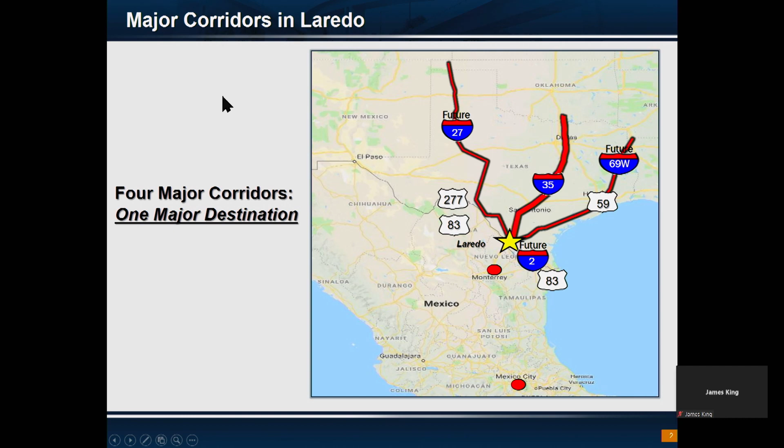For those familiar, that Ports-to-Plains corridor, which constitutes US 277 and US 83 in our area, was designated by the legislature through House Bill 1079.

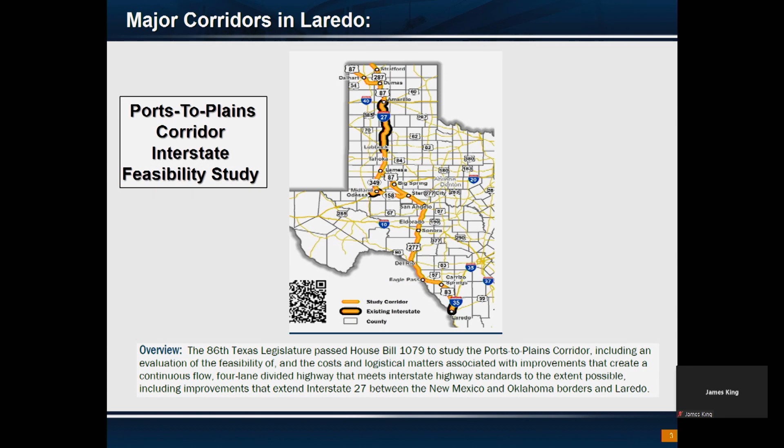So that is how that corridor got designated. The main purpose is to create another main north to south arterial throughout the entire state. 70% of the population in Texas lives on I-35 or to the east. I-35 is the only major north to south interstate throughout the entire state. When you think about how big the state is, this I-27 corridor is going to help further populate and drive economy throughout the rest of the state.

Currently, in the TxDOT Laredo district, those 8 counties I showed you, we have $474 million of projects under construction. In Laredo, Webb County alone, we have $314 million currently under construction.

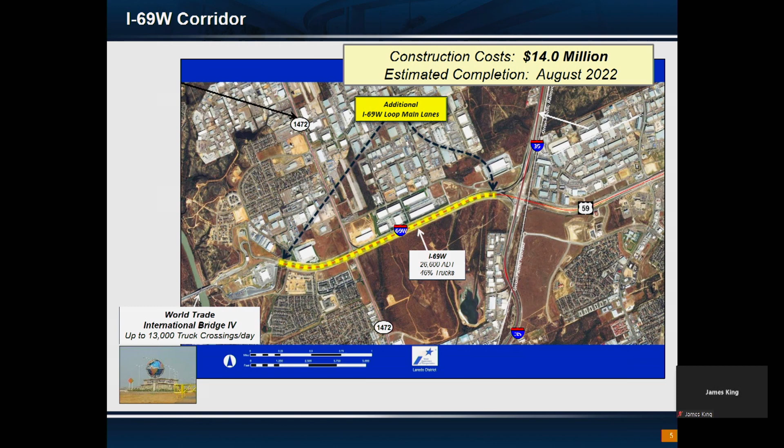The importance of that, in conjunction with the project the city of Laredo is doing to expand the fast lanes with $10 million of CBI funds that has oversight from TxDOT, is to create a more efficient flow and safe travel of commerce in and out of the World Trade Bridge. We hope to have it done within the next year so that you all can continue to operate more efficiently in that area, in and out of the World Trade Bridge.

And how does the deadline look, like the completion date? The deadline looks good. If you notice right now, we're widening the bridge, which is kind of the last phase that we have there.

We're also going to be adding an off-ramp that comes off the direct connector that brings you into Laredo and takes you to the World Trade Bridge. We're adding a brand new off-ramp that lets you get off at that point so you don't have to go to the existing off-ramp.

So for people using that route to go into that warehouse area, you can get off and already make that maneuver ahead of time instead of having to go down to the intersection of Mines Road and I-35. That'll be an extra off-ramp that doesn't currently exist right now. So you'll have an off-ramp.

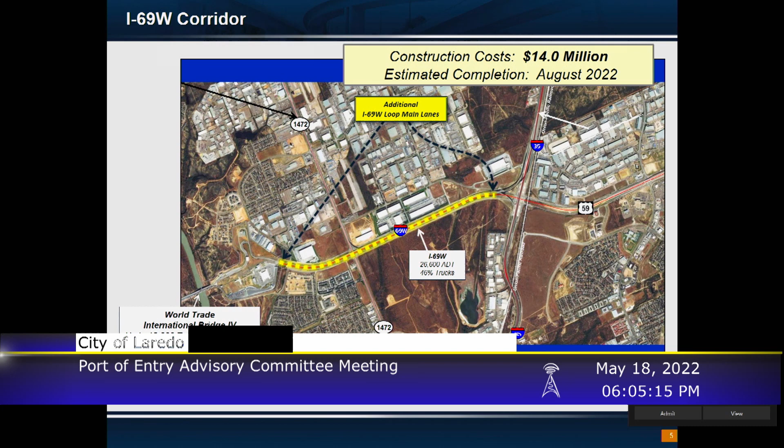And we're going to do it? Where is that going to be? So the off-ramp that comes on the direct connector, that's coming south to west—yes, south—that direct connector will have its own off-ramp, getting off onto the frontage road. Okay, yes.

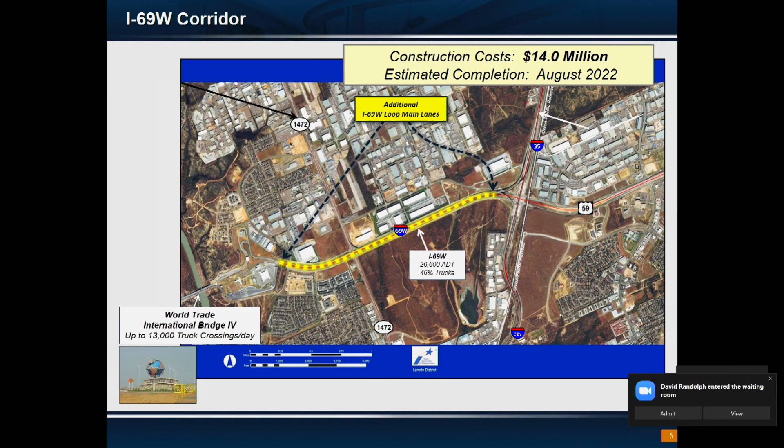Another major project we have, just not even a mile east of there, is the project everyone sees under construction, where we're bringing a brand new bridge over Union Pacific. Right now, just north of Shiloh, you go underneath the railroad bridge. We're going to fill that completely once the bridge is done, and you will only go over it.

We're building 2 direct connectors: direct connector number 5, which goes west on US 59 to south on 35, and direct connector number 8, which goes east on 59, south to 35. We're also completing a section there to widen I-35 to 6 lanes. Texas has an initiative called the Texas Clear Lanes Initiative to widen 35 to 6 lanes throughout the whole state, and this is our part to continue completing that initiative.

You see referenced direct connector number 5 and number 8. If you look at what we have built right now at the intersection of I-35 and I-69, we currently have 3 direct connectors built. This project will complete 2 more, so when everything is complete, there'll be 8. The next 3 are programmed to come down and get constructed in that area.

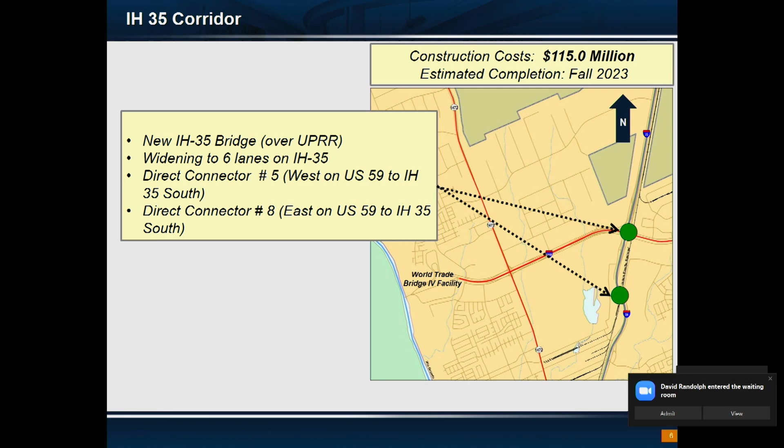So the exciting part here, right? In the next 10 years, we still have over $1 billion of project funded in the Laredo district. And given the fact that Laredo is our major urban area, given the importance of the World Trade Bridge to the rest of the state and the rest of the country, and obviously the population driven, which dictates a lot of the formula of how we get money...

$660 million of that $1 billion is going to come to Laredo Webb County in the next 4 years. So it's going to be a very busy time for construction and a lot of growth and expansion for the city.

So I just want to put a disclaimer here. I'm about to show you some estimates, some letting dates. As you all know, we live in a dynamic industry with prices of materials and construction costs going up. So all the information I'm going to show you, the let dates, construction estimates, may be subject to revision. We do keep a close monitor on them, but given the climate we're under right now, some of them may be subject to change.

So the first project I want to touch on here is the US 59 corridor, which is the future I-69. This project has almost $290 million of funds secured - that's funded money already secured for this project. In addition to that, we have another $166 million of right-of-way costs associated with this project.

The main emphasis of this project is it's going to take US 59, or Loop 20, to interstate standards. Right now you only have 3 lanes in each direction. When it's all said and done, you're going to have a loop that looks like Loop 410 in San Antonio - one-way frontage roads on each side with 3 lanes in each direction, and then main lanes in the middle, 3 lanes also in each direction going north and southbound on Loop 20. So in total, you're going to have 12 lanes of traffic along that I-69 corridor.

The first project we have programmed for August of 2023 is going to build an overpass at Shiloh, an overpass at Del Mar, and an overpass at University. Along with those overpasses, we're also building the frontage roads on the side, so it's going to be a complete constructed interstate up to University. The project that follows is going to complete the overpass at Jacaman and the overpass at Airport, along with the frontage roads in that area as well.

And again, the point of this is this will complete or upgrade US 59 to interstate standards all the way from the World Trade Bridge to the intersection of I-69 and Saunders.

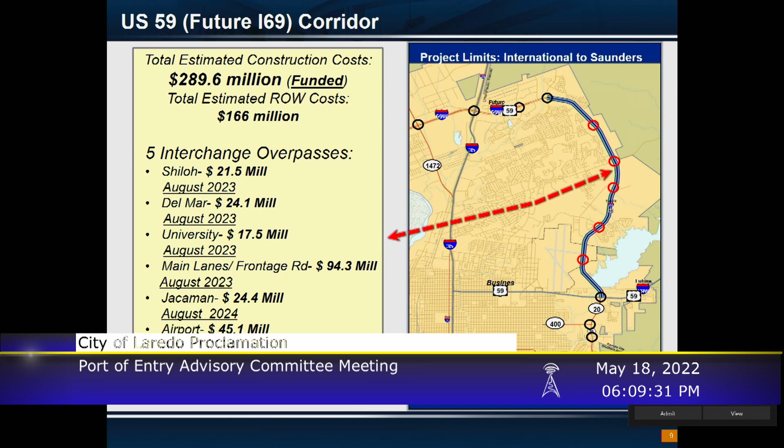Is that the proposed finish date or is that the start date? So these dates are the proposed dates when we let the project. What that means in TxDOT terms of letting is that's when we go to bids. TxDOT awards the project to the low bidder that meets all the specification requirements the state has. Normally the construction start date is about 3 months from that let date. Given a project as complex as this one, the estimated time frame we have right now is about 36 to 40 months.

Thank you. Are you still missing some? No, that is all the money, all the funding for those projects for the district. Are you still missing overpasses pending? No, for that area, from this project, we'll complete the interstate all the way from the World Trade Bridge all the way to Saunders - complete, all the way to Saunders.

So when you look there, I'll show you now what the plan is. The plan from there is going to be to take I-69 to the east, which is the ports-to-ports corridor that'll connect us with Houston eventually one day. So I'll show you that plan.

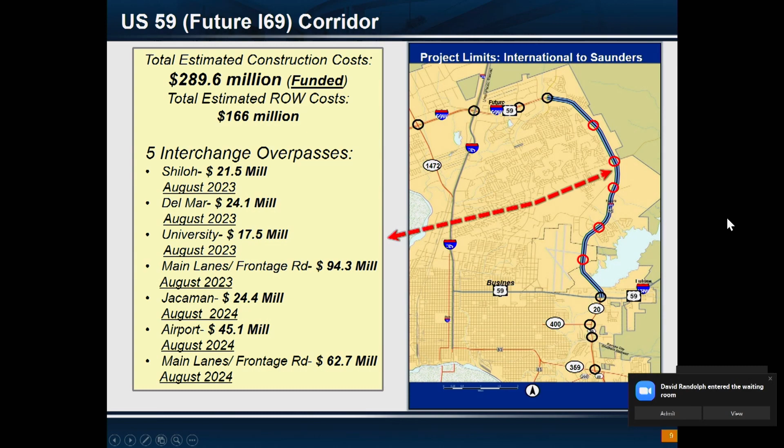Another major project we have funded is a bridge replacement and widening of I-35 to 6 lanes at the Uniroyal Interchange. Everyone is familiar with I-35 and mile marker 13 with the congestion that occurs at the Unitec Park and 35 area. So what we're going to do is completely remove and replace that bridge, that current overpass at Uniroyal. Underneath, as you exit Unitec to cross east and west, that's going to be an 8-lane section underneath there - 8-lane section, we fix the bridge.

We obviously go in there and redo all the railroad crossings, so there's a lot of coordination we're doing right now with Union Pacific there. In addition to that, we're going to design a brand new interchange about 1.5 miles north of there, where the future Hachar-Reuthinger connection is going to be. That's going to connect Mines Road with I-35.

The intent behind that is to be able to properly plan a full, efficient movement interchange at that intersection, similar to what we have at I-35 and I-69. So when you think long-term, I mentioned 8 direct connectors. You see the multi-levels that we're building on I-35 and I-69. That is the plan we have in the future for the intersection of I-35 and Hachar as well.

Are they ever gonna align Killam with 35? You have to turn right and then turn left.

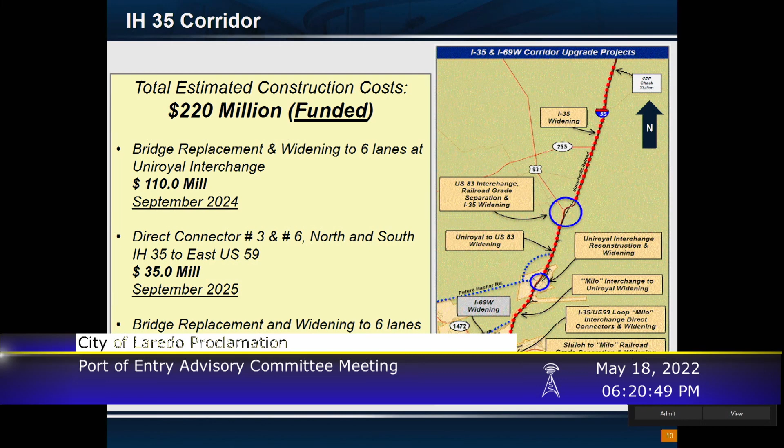I've seen this presentation, which is really impressive, and thank you for presenting it today for others who haven't seen it. But it's just frustrating because things are not happening immediately. You look at those dates, but realistically, we now have the problem with materials and labor, and all those things come into play. You look at the dates and think, well... Yeah, they can never get here fast enough, believe me, we're the same.

One of the things to acknowledge is that once construction starts, stuff is going to get a little bit worse as far as inconvenience for the traveling public during construction. But the point I want to message or send home is that we are on the right track. These are funded projects, not wish lists, not what-ifs. These are projects that are funded. Plans are completed, environmental is finished, utilities are relocated, right-of-way is being purchased. So we're on the right track. That's the message I want to stay on.

So moving forward, I know we're running a little over time. Again, we talked about the 8 direct connectors in the future. The other remaining 2 are funded at $35 million, which will be north and south I-35 to East 59.

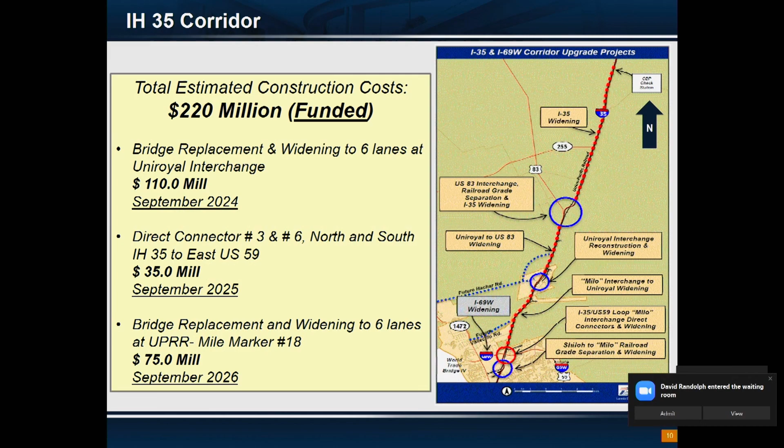And then at mile marker 18 on I-35 currently, where our tourist bureau is, you have to go underneath the railroad bridge. We will be filling that underpass and moving that bridge about a mile to the northwest, so you will now go over the bridge instead of under. We're also reconfiguring the way IH-35 and US 83 connect, building a direct connector that takes you from IH-35 northbound to US 83 northbound, so you won't have to get off at an intersection anymore to do that maneuver. That project is very important, since that section of 83 is the future I-27 corridor, making it another critical intersection for the city of Laredo.

You said you're going to move that bridge. What's the logic behind that, taking into consideration—I know we're growing, but it just seems like it's double work. And is UP helping fund some of this project or not?

That project, if you look at it right now, has gotten hit quite a few times. It's in a vertical curve and a horizontal curve, which is not ideal anymore with the new design speeds and requirements that the federal government requires us to have. So part of that project is to upgrade it and make it safer for the future, and to fix that intersection so we have more mobility where those two interstates, I-27 and I-35, are going to meet.

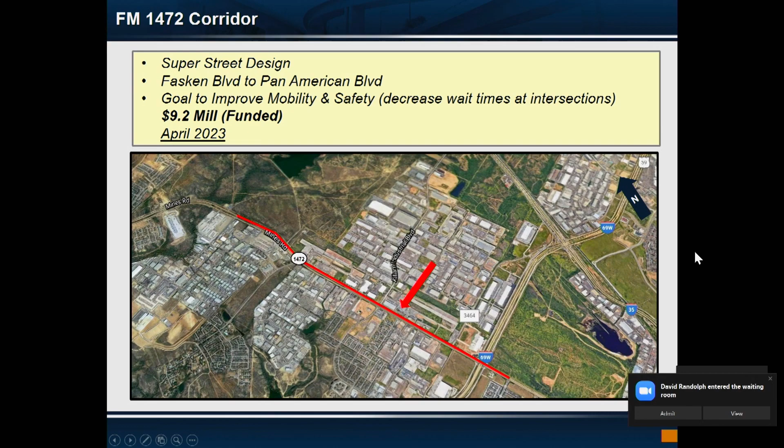Ito, are you touching the turnaround lanes for Killam? Let me see, how do I go back? Which ones exactly, the turnaround, the right turn lanes?

So if you look at the right turn lanes, there's actually a project under construction right now adding an additional right turn lane onto Killam Boulevard. So if you're heading north on 1472 Mines Road, taking a right into Killam, we're building a brand new, free designated right turn lane all the way from Fasken to Killam.

We partnered with the RMA and we're also helping them construct a right turn lane from Killam heading westbound onto Mines Road northbound as well. So that'll all be dirt right now. That's correct.

Why has it taken so long? So that project, if you look at it, there were modifications that had to be done to the traffic signals in that area. Those of you involved in construction know there's been a shortage in steel and delay times, and that was the main reason holding up the contract in that area.

But that project is underway, and I was told material should already be here within the next month, so construction should be commencing shortly. And they ordered those poles? Yeah, they ordered those poles about 8-9 months ago, and they're barely getting them now. That's a big... shortage.

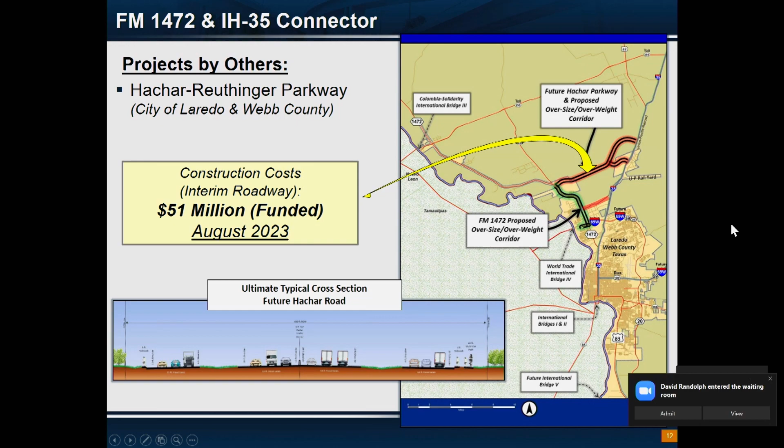So the next project, just real quick, these are unfunded and under development projects. These are projects we don't have money for, but we know eventually we're going to have a need for them. So TxDOT is taking a proactive approach to design them and get them ready, so when funding becomes available we can have them ready to let.

So at IH-35 and US 59, there's that one pending direct connector that doesn't have funds. That'll close and finish up all eight connectors, that's 25 million. Obviously, IH-35 at Carriers and the XXX overpass, we're going to be widening both of those overpasses at 45 million. So we're already working on plans for that.

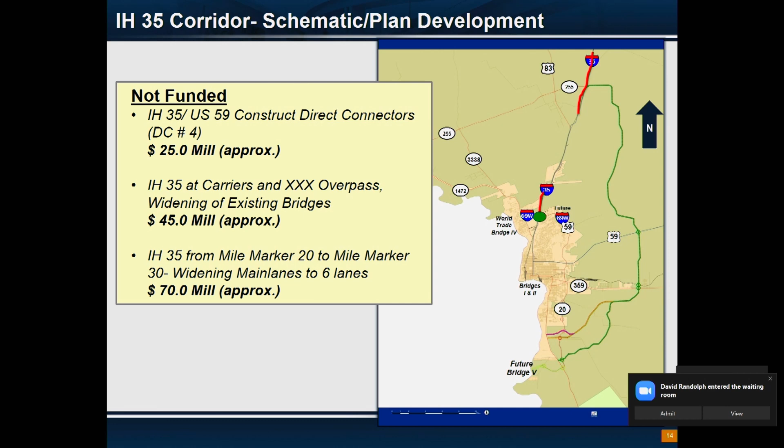And then we're looking at expanding and widening I-35 from mile marker 20 to 30 to six lanes. That's part of the initiative I spoke about, taking it to six lanes throughout the whole state, and that's another 70 million. And then certainly not least, another project very important to the area is Vallecillo Road.

It's a project currently being developed by Webb County, by the RMA. It's currently partially funded at 17.5 million, so there's a gap there, a 14 million dollar gap. That's the money the RMA, the city of Laredo, and Webb County are asking the Transportation Commission to fund through those Category 12 funds I spoke about earlier, to try to get it fully funded.

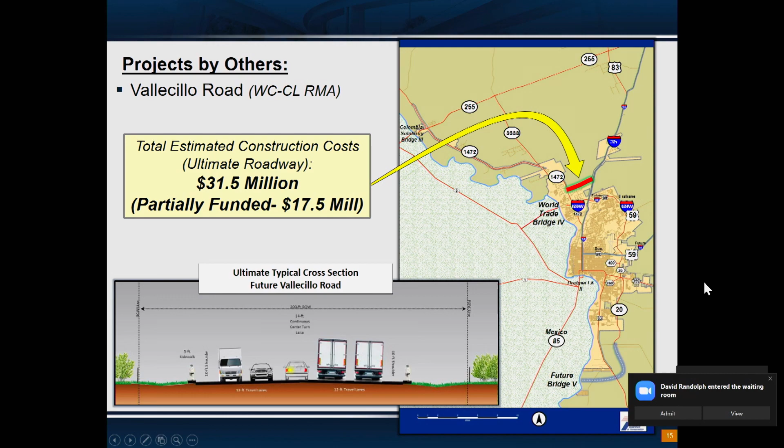Chairman, could I make some comments? Yes, sir, go ahead. Thank you, Tito, and thank you for the presentation you gave last week, and to the members of the committee who were able to come. We had a little more time and had some healthy dialogue.

I'd like to suggest that, in addition to all the funded projects that need to stay on schedule and provide that mobility and infrastructure, the unfunded portion of Vallecillo Road should probably be high on our radar for lobbying and advocacy and support letters, and for us to come together as a community, public and private. It's because it's so important to have that outlet on Mines, between Mines and 35.

Could you share for a minute what you shared last week about the possibility of Category 12 funding filling that gap, as far as how the process works? Well, I don't want to put words in your mouth, but what I understood last week is that we may get some good news in August that the Category 12 money could fully fund the remaining portion of Vallecillo.

Again, those decisions are made by the Transportation Commission. They're currently deciding that, and we're hoping to have an answer by August. I guess really with TxDOT locally, we don't have an impression of whether that money is going to come through, so I apologize, Mr. Lincoln, if we gave a false impression on that.

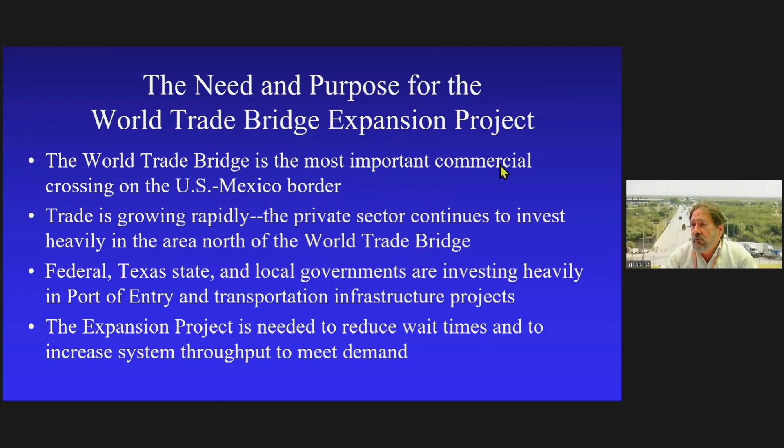World Trade Bridge is the most important commercial crossing on the U.S.-Mexican border. Trade is growing rapidly. Private sector is continuing to invest heavily in the area north of the World Trade Bridge. Federal, state, and local governments are investing heavily in port of entry and transportation infrastructure projects. We saw some of those earlier. This expansion project is needed to assist in reducing wait times and to increase throughput at the port of entry to meet the increased demand that's going to happen. We know it's going to happen. The demand has already increased dramatically since the bridge was opened back in 2000.

Some statistics. This is from the Border Trade Master Plan that was prepared and published in 2021 by TxDOT. I think Joe mentioned this particular report. In 2019, we had about 2 million trucks come through World Trade Bridge. The wait times averaged back then 30 minutes. The 90 percentile wait time, which was the upper end of the wait times, was 53 minutes.

TxDOT is projecting that we're going to over double the throughput at the port in 2050. So 5.1 million trucks are going to come through the port. The wait times, if nothing else happens, nothing else is done to improve the throughput or the bridge or anything beyond even port of entry, are going to rise to 527 minutes for standard days and standard times, and up to 930 minutes for the 90 percentile wait time. This is an increase of 255% in volume only, and over 1,600% in wait time. So we need to get working now to make sure we don't achieve these in actuality.

We want to make sure things work better. One of the things that's going to help assist the throughput at the World Trade Bridge is the Fast Lane relocation project. And what you see here is a drone shot, about a month old, photo of the Fast Lane project.

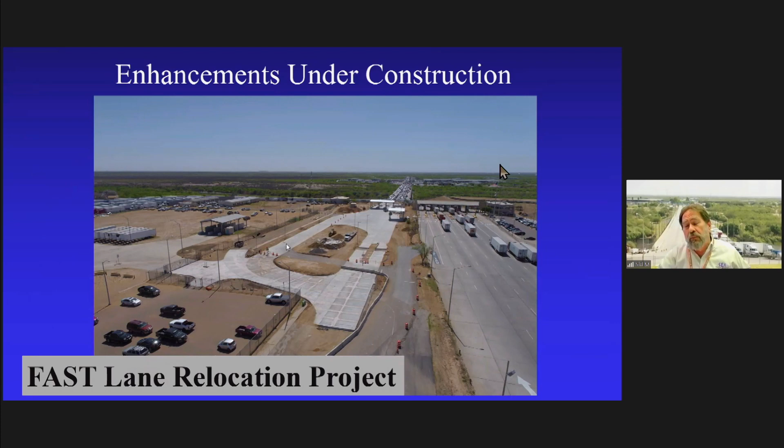Other projects ongoing: a right-hand curve coming out of the existing exit booths that are there today. This has been a topic of discussion between ourselves, the city of Laredo, and the Mexican counterparts for many years. In reality, most of this widening section is being done by TxDOT now as they widen I-69W as it exits the port.

Also in process are existing lanes weigh-in-motion scales. We're working directly with the city of Laredo and their technical consultant, Transcore. Transcore has our 99% complete construction plans and is reviewing them now to make sure it works well with their equipment. We're planning to try to construct this facility this summer as well.

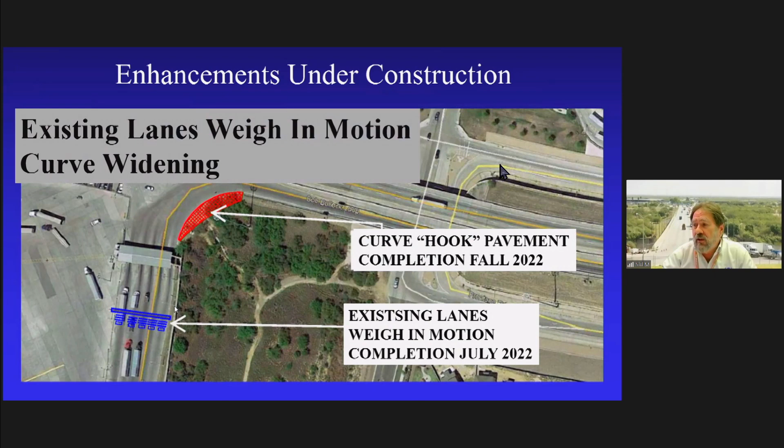The thing that may cause us a little problem is a steel overhead sign bridge, and there's also some computer hardware that needs to be acquired by Transcore. As you're all aware, some of that stuff is hard to get these days, so we're working to get this moving forward.

This ties into some of the projects Mr. Tito Rodriguez already talked about, the widening of I-69W. We'll be pushing about 2,000 trucks a day through the fast lane that'll hit this widened section. They'll be finishing this widening about the same time we're finishing the fast lane, so they're all going to tie together pretty well.

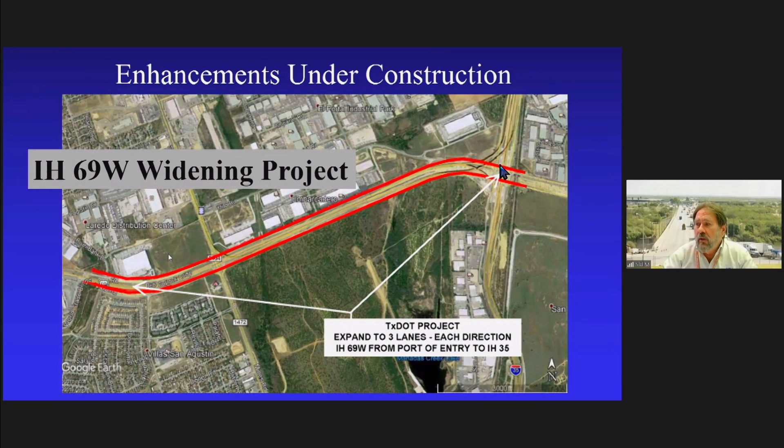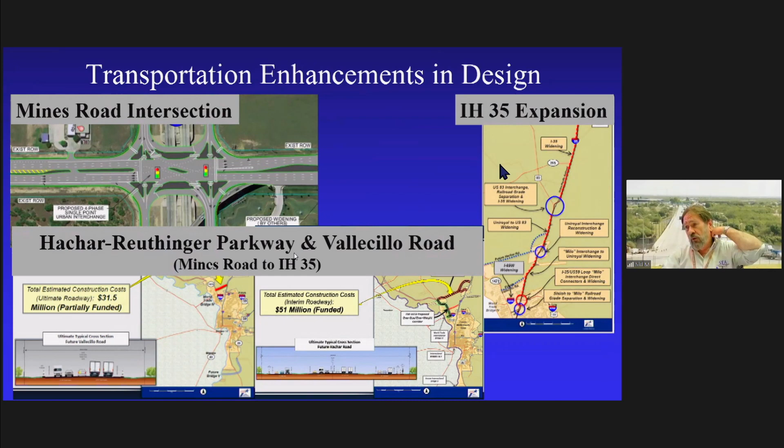In addition to all these things already in the pipeline, the next logical step to complement enhancements of the port of entry, the fast lane, the TxDOT improvements, and the expansion of the other transportation corridors on both sides of the border - they've improved the roadway into the Mexican side of the World Trade Bridge from Highway 2 a couple of years ago, and they're making improvements inside the port of entry as we speak. But the next logical step is the expansion of the World Trade Bridge.

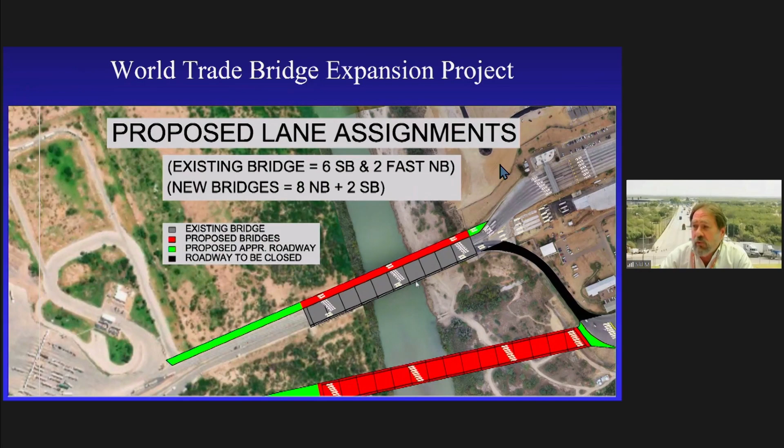So that's the lane assignments, that's what we're looking at right now. We have proposed this, as I mentioned, to our counterparts in Mexico. They are in verbal agreement with us right now. We think there's a lot of things that can occur.

I may back up to this slide in a minute, but I want to talk about some of the progress we've made so far on this project. Many of you remember back on September 16th, the City Council made a motion to approve the expansion project and move forward with the presidential permitting for it.

On September 25th, I was there in Laredo, and Mayor Saenz and Governor de Vaca had a meeting and a press conference. Congressman Cuellar was also there, and that's when the mutual agreement was made to move forward with the City of Laredo as the U.S. sponsor and the state of Tamaulipas as the Mexican sponsor and concessionaire, to move forward with the expansion of the World Trade Bridge.

On February 8th of this year, we got $1 million of federal funding assigned to this project, for several reasons. One of them is that the federal government, under the previous administration, revised the rules for presidential permitting, and there was a change in the way environmental clearances were reviewed and issued.

In our discussions with the Federal Highway Administration, that agency volunteered to be the shepherd, if you will, or the lead federal agency for environmental clearance, but there has to be some federal funding in the project for them to be active in it. The same thing goes for TxDOT.

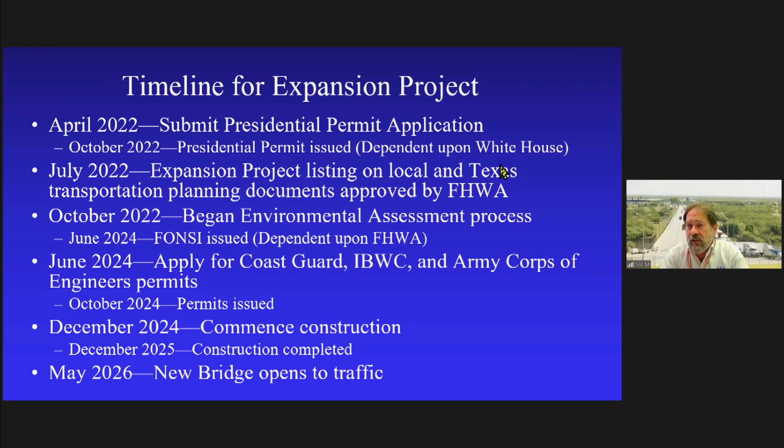Backing up a little bit, we're looking at possibly June of 2024 for having the FONSI issued. That's going to depend on getting the STIP approved and moving forward after that. We hope to begin construction in December of 2024. This project should take about 12 months. Both phases should take about 12 months to complete. When I say both phases, I'm going to skip forward a minute.

Yeah, okay, in just a second. And then we hope to have the bridges open in 2026.

Before I open the questions, I wanted to mention a couple of things. As we mentioned, this will all be northbound lanes, 8 northbound lanes. When we say we're adding 2 lanes, we're not really adding another bridge. We plan to connect these 2 new lanes to the existing bridge in the same manner TxDOT widens their bridge today, so we can get the best price from contractors.

As I mentioned earlier, this piece of roadway now in construction will not be used. It will be left in place, but not used. So we won't have 4 lanes trying to move down into 2 or 3 lanes and then another right-hand turn. We'll have all 8 lanes going straight into the 15 primaries on the main port of entry, 2 lanes coming straight up into 4 lanes for the new FAST facility, and a total of 8 lanes coming southbound into the Mexican port of entry as well.

We believe a combination of widening the bridge, the fast lane project, and ongoing improvements, plus planned improvements at the Mexican port of entry, will help speed and increase throughput through this whole port of entry area, the bridge and the port of entry, getting trucks through there and pushing them out onto the highway via TxDOT.

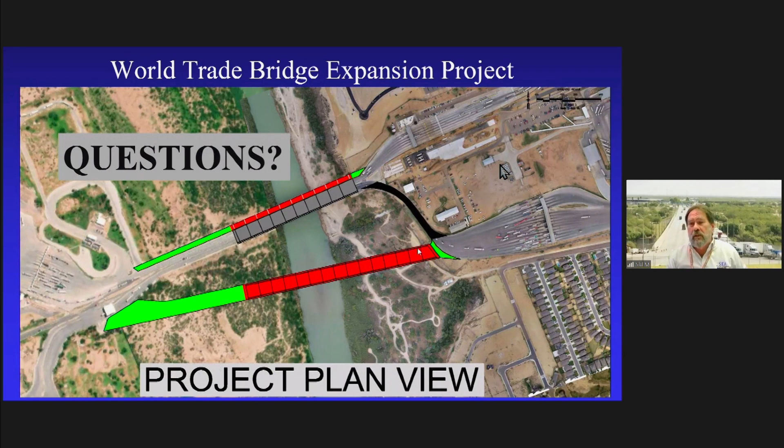Regarding permitting for hazardous materials, I don't know the full status. On the U.S. side it may already be permitted, but on the Mexican side they didn't build this into the port facility. That's something we've discussed with our concessionaire on the Mexican side, and possibly we can push for it. The point is, whatever the city has already done for containment on the bridge, we'll continue with that process. The new bridge will be outfitted the same way. So short term, we'll have everything in place to allow that permitting to be finalized, even once this bridge is open. We're not doing anything that would restrict the use of hazmat through the port.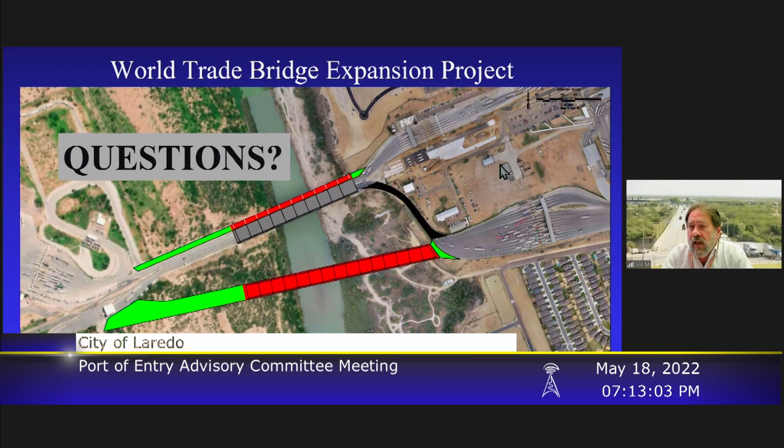My question, repeated differently: it seems like you're doing the containment area, but is the hazmat process being included in the permit itself, yes or no? No, it's not included—we did not include a special additional hazmat permitting request in this presidential permit application.

Thank you. I think the city already made that request to the federal government some years ago—I may be wrong and need to do some research. But I thought the city of Laredo had already requested to allow hazardous materials to cross the bridge. I think there are certain hazardous materials below a certain level of hazard already crossing. No, that's a CBP thing—it's a different issue.

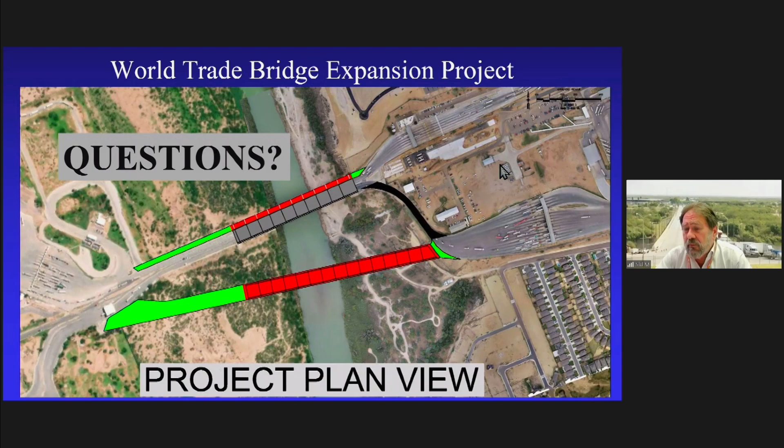Committee members, if I may—Eva Limon for the record, sorry about my voice. We did receive the amendment to the presidential permit, which allows less hazardous material to cross through World Trade. However, the Mexican side has not completed the off-site containment facility. Therefore, the diplomatic notes were never exchanged. So we do not have authorization. We have the amendment granted, but we do not have authorization to proceed in allowing the crossing of hazardous material to World Trade.

One more question—what is considered less hazardous? Non-explosives, non-radioactive, flammables—it's a certain category by U.N. codes.

Going from grade 1 to 2 and further on, must those go to the bridge? I would need to check what the city would allow through that, but CBP needs to approve it—it's not the Mexican side approving it, it's CBP at the end of the day.

Okay, right, thank you Ms. Mo for that. Okay, and then, okay.

In the last increment of the toll bridge, the money we're going to use for the fast lane was $10 million, but then they brought CBI money from Loop 20 and injected it into that, and the tolls stayed up—they didn't decrease the toll.

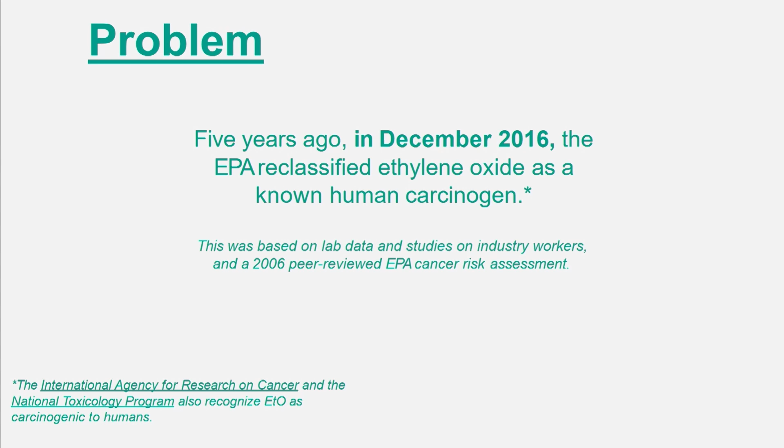So apparently this has been going on with not just this company, but all commercial sterilizers that use ethylene oxide. And so we're here because of that. We didn't know, and now we do know. In December 2016, the EPA reclassified ethylene oxide as a human carcinogen. So before that, they didn't know if it could cause cancer, maybe, maybe not. But then in 2016, they went ahead and said, yes, for sure it does cause cancer. It's not a debate on whether it does or doesn't. It just depends on the individual human body whether or not it's going to cause cancer for each person, but it is a carcinogen. It's a class 1 carcinogen.

It has no color, no odor. You really cannot tell it's there. There's no way to know. It's flammable, you know, all the details about it. It's used to sterilize medical equipment in Laredo.

And then it has a byproduct, which is antifreeze. One of the unique characteristics about it is that you can sterilize plastic, and the particle is so small that it penetrates almost anything. So that's why they use it, because it's not just for stainless steel equipment, but also plastics and everything, and they blast everything all together and it sterilizes the whole thing.

So it's good for the medical industry to prevent infections and things like that, but it does have some downsides for the communities that have these sterilizers in them, which is what we do in Laredo.

It's mutagenic, so it changes the DNA in a cell, which is actually why our children come into play here, because since our children are still growing and their DNA's replicating, if they're exposed to this chemical, it could cause their DNA to change and mutate, which increases their chance of cancers and other complications down the line. That's where we all got concerned, because we all have children, and we want to make sure they're protected and not exposed to it.

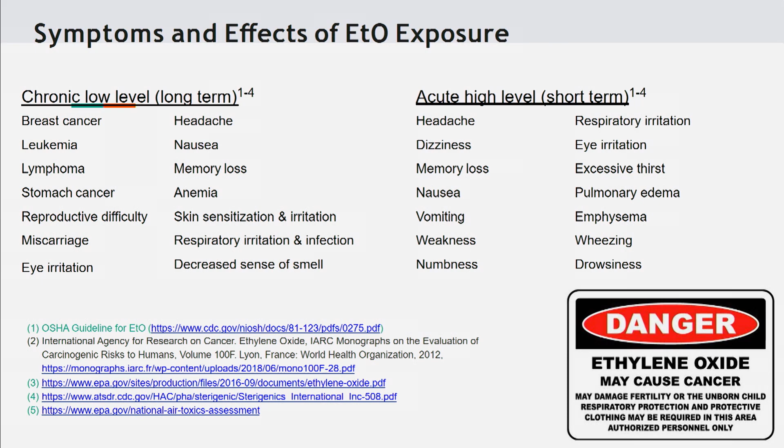Chronic -- that's when you start to see the cancers over time. What we've learned is that it takes about 15 to 20 years for some cancers to start. This plant has been around since 2006, so you're just now starting to see some people coming down with cancers.

Long-term exposure, again, myeloma, leukemia, breast cancer, lymphoma.

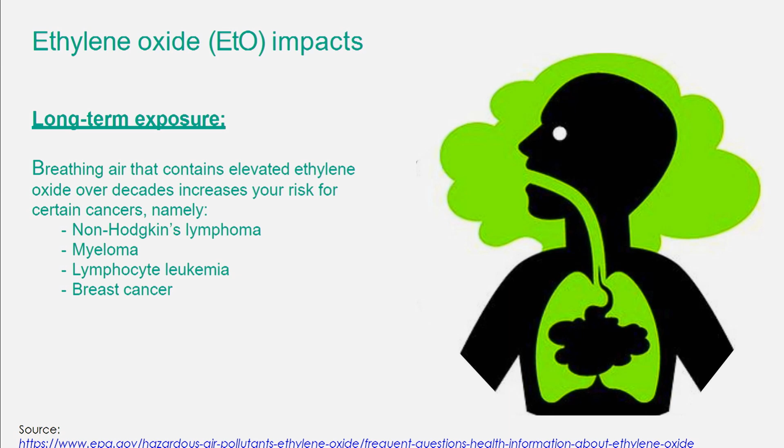But even with these numbers, they are the plant that emits the most ethylene oxide from all the sterilizer plants in the United States. As a small company, they're the largest emitter of ethylene oxide. And because of that, they're classified differently than a bigger corporation would be, so they fall under different regulations by the EPA. That's kind of an issue too.

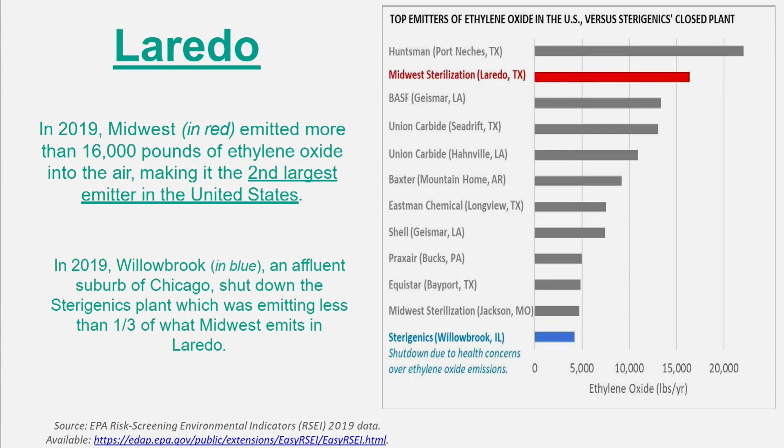Again, that's what I explained -- second largest emitter. I'm sorry, I said first largest. I misspoke, it's second. I'll move on.

Okay, so Willowbrook -- this is important because one of the rebuttals you'll hear in the industry is that ethylene oxide can come from so many different sources. They've said it comes from bananas, from traffic. A lot of their PR efforts have gone toward blaming your guys' industries, the trade industries, the trucks, stuff like that -- like it's not us, it's because Laredo has all these trucks. So one of the coalition members, Ursula Tanwe, was a co-founder of Stop Sterigenics in Willowbrook, Illinois, which had a sterilizer only putting out about a quarter of what ours is putting out here in Laredo.

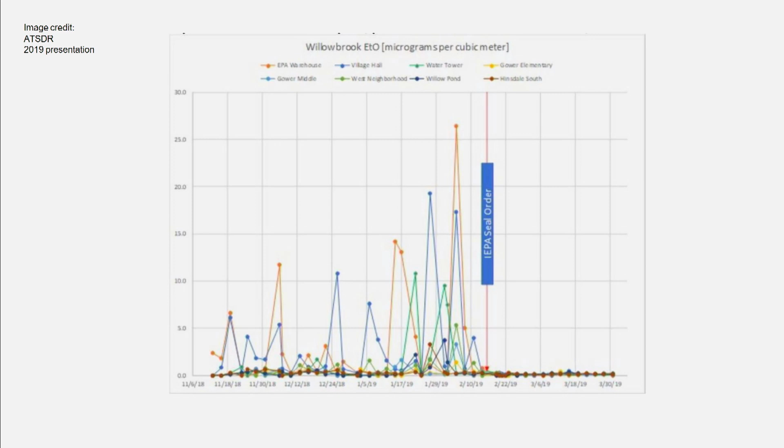So ethylene oxide does exist in other sources that emit it, but the reason ProPublica and all these reporters did this data work in Laredo was specifically because of this one particular sterilization plant that emits high levels of this chemical into our community every day. Third in the US for highest cancer hazard from air pollution. These are all facts I can present to you, but I'm going to rush through it.

ProPublica, again, they were targeting mostly the children. The EPA sets their target for acceptable cancer risk at 1 in 1 million. In most of Laredo, the data shows the cancer risk is 1 in 30,000 because of this plant. So it's not 1 per million, it's 1 per 30,000. And if you're in close proximity to the company, your cancer risk is 1 in 560. It's significantly higher for the people who live and work in this area every day.

Who gave those numbers? What is the source of that number? The source for this one is... I will get the source. I don't see it here.

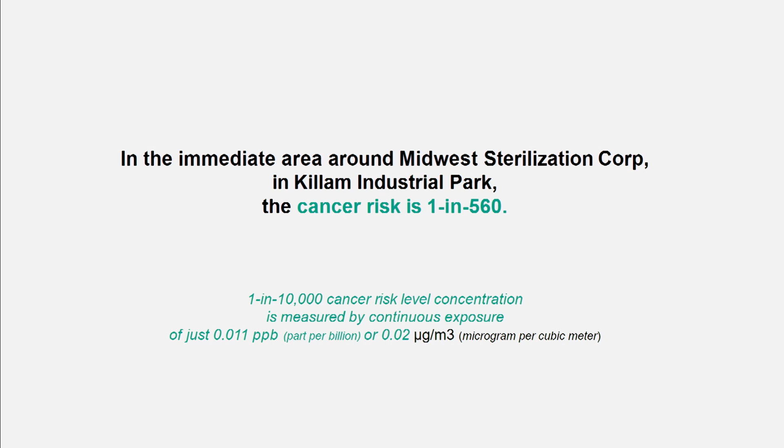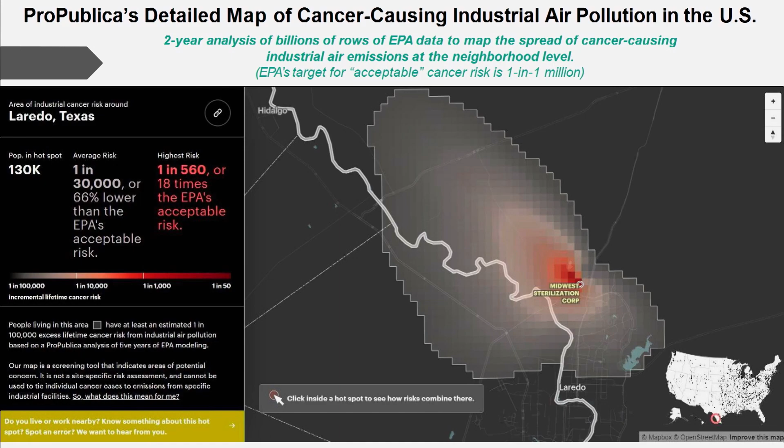It's here, ProPublica, this is the source. You go in there, put your address, and it tells you what your risk is. If you put in the address for Midwest Sterilization, it shows red and tells you right there: highest risk, 1 in 560. So it's based off this map that brought all of our attention to what was going on. They spent a 2-year analysis to build this map. So it's all based on research.

The area in red is where it's most affected, then orange, and then lighter shades of yellow. Basically, our entire community is in some sort of elevated risk just because of the amount, the wind, and all of that. I think they based this on the size, the emission amount, and how the chemical flies around.

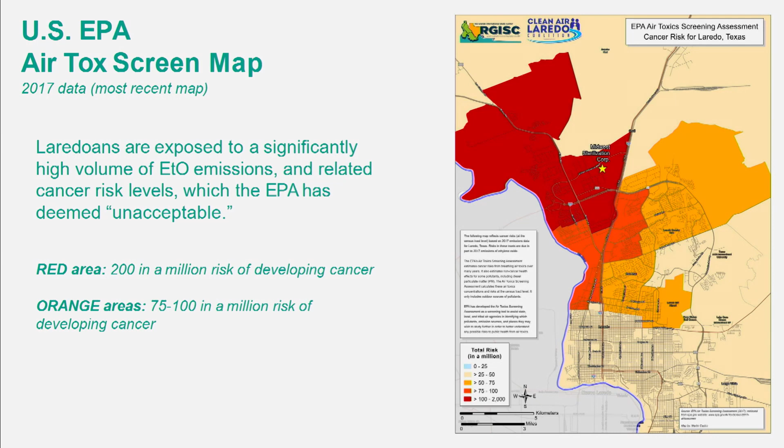Those are the risks from there. All the schools in Laredo, 10 of them rank in the top 1% for all schools in the United States for most toxic air pollutant exposure because of ethylene oxide. Our schools are actually being ranked based on exposure to this. Again, it's 60 times more toxic to children. Source: Air Toxics at School Project, Political Economy Research Institute, PERI of University of Massachusetts at Amherst. They put this study out.

They listed all the schools: Muller Elementary, Faskin, United Day, Kazin, Finley, George Washington Middle, basically all the schools on the west side on Mines Road, Troutman Middle, Elias Herrera Middle School, Malakoff, Mary Help of Christian, and they rank lower and lower based on distance, but all the schools are there. Those are the worst air toxic ranks in the country, which is pretty scary. At the top of that list is Muller Elementary School, which is close by — the cancer risk for those children is 1 in 3,700 instead of the 1 in a million acceptable rate.

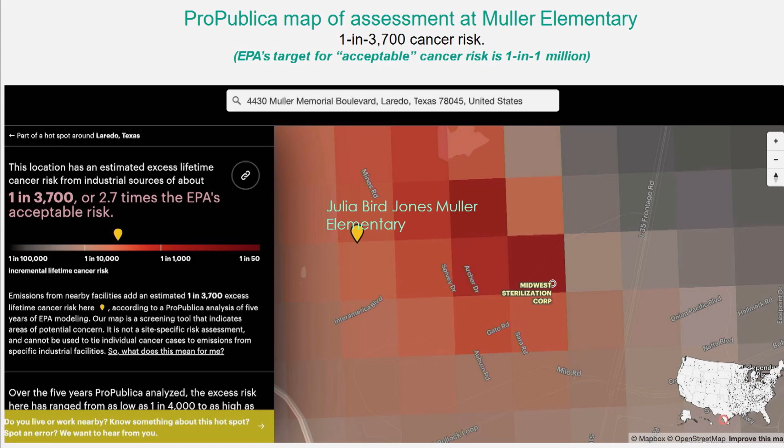So you can be part of the solution. I guess that's what we're here for. I know I rushed the presentation and I'm not normally the one who gives it, but I think this is an important thing to keep our eye on and to know more about, to make sure we verify all of this data that's been given to us by these companies doing this research.

They don't come and monitor. We need to monitor, just the way Sterigenics in Willowbrook, Illinois installed air monitors—that's what we're pushing for. One of the obstacles we've had is working with TCEQ and EPA. They were not on the same page. TCEQ says there's no problem, EPA says there's a problem, and they're not in agreement with each other. So we've been working with Congressman Cuellar and our state reps, and Senator Zaffirini, to get TCEQ to the table and hash this out so we're all on the same page. We're just asking people to sign up with us, to stay involved and informed.

We were supposed to meet with EPA in Washington on June 1st, but because of COVID they canceled the meeting. We still want to go over there and talk to them and figure this out, because the EPA is revising their rules this year for what is allowable and what is not allowable.